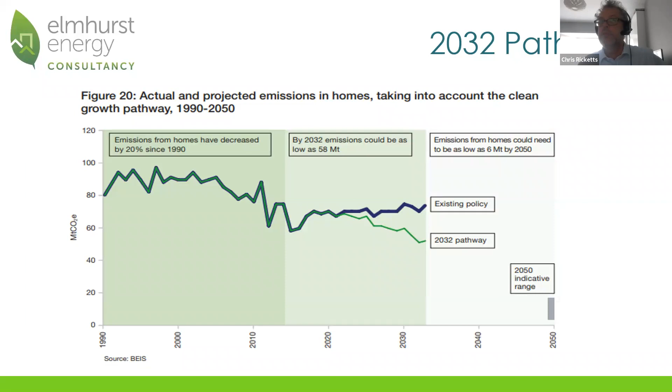And so they came up with this clean growth strategy. And that was all about growing the national income whilst cutting greenhouse gases and their emissions. And hence we'd seen noises about trying to be a leader in wind farm technology. They wanted us to lead the way. And I think it's actually quite good that the government are doing that. And as a consequence, I think there will be lots of employment within this kind of sector.

One of those things was a big commitment to review building regulations. So that's new buildings going forward. And as a consequence, every new building going forward would have to comply to a standard, but then we would have to go back and look at the existing stock and improve that stock. And then they started putting other levers in place as well.

So if you have private rented homes, by 2030, you won't be able to rent them unless they achieve an EPC band C. And they're going to do the same in the commercial sector and the industrial sector. So there's little levers the government will be using to make sure that we are heading on this pathway.

And while this was all going on, we were obviously part of the European Union. We did leave, obviously, but what they did do is they enshrined a lot of those laws that we had in place, those environmental laws, into UK law. And that was a great step for instilling, I reckon, a lot of confidence in this sort of energy sector. Even if we hadn't, we would still have had the UN Paris Climate Change Agreement. And there were some clean growth missions that we had about improving standards and reducing carbon.

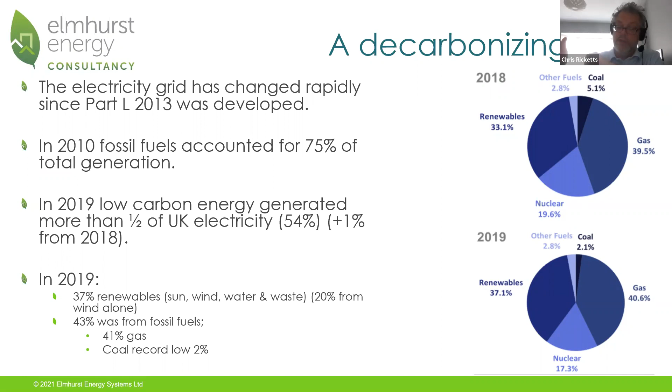Nuclear, interestingly, which is classified as a clean fuel, fell by about 13.6% in 2019, which is one of the lowest levels of nuclear generation. But there has clearly been a turn of removing coal. So you're still getting gas-fired power stations in there, and we've seen a massive increase in the renewables feeding into the network.

So if you look at the future, what they're saying is electricity is becoming a clean fuel. So they're saying, we see this as a way to move towards our net zero obligation. So this won't just be for buildings. Obviously, this will be for other areas like transport. So if we all have electric cars and we're using electricity on the grid, and that electricity is being powered by solar and wind, it is a clean fuel. So they're seeing renewables building, and the generation is being driven more by renewable technology.

Natural gas, they're expecting to decay, and we may have to import some in some areas. It depends on grid demand and energy use, and that's part of the challenge that they have: development of a strategy also means that people increase their usage, but what they're trying to do is reduce the demand per footprint. So somebody's home, instead of using 15 kilowatts, uses 10 kilowatts. So it's all about reduction per area to allow that expansion in growth in our strategies.

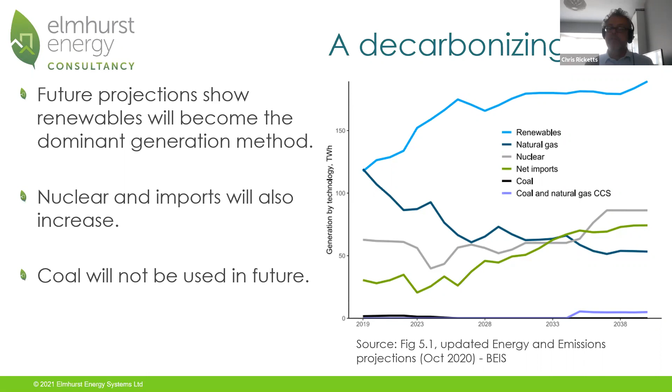If you go to mygridgb.co.uk, you can see the present electricity mix in Britain today. So this was a snapshot; in fact, I just did it about an hour ago. Interestingly enough, we were 47% from low carbon sources at the moment, and it was producing something like 36.5 gigawatts, with a carbon intensity of somewhere around about 245, an hour ago.

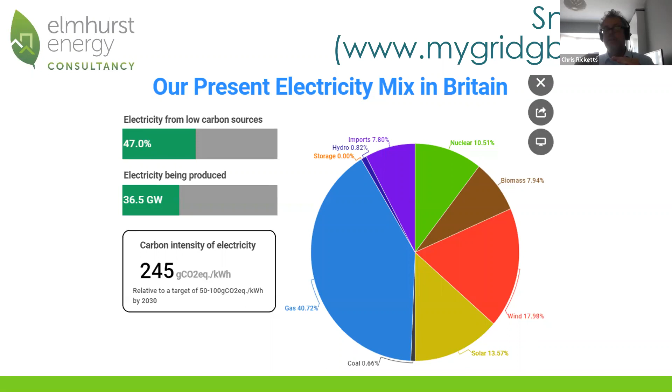So if we want to target for 2050, and we've got this milestone at 2030 of being 50 to 100, we're still way off it at the minute. But compared to 10 years ago, that is a massive move, and what that is representing is that electricity is being seen as a renewable source.

So where does that fit us? This comes to the Future Homes Standard. That clean growth strategy where the government announced we've got to get ourselves on a pathway, we're going to do this Future Homes Standard. So we want all new homes from 2025 to be 75, 80% less carbon emitted than homes built today. And we're in building standards that are 10, 11 years old in some instances, and just the way some of those standards are allowing homes to be built.

So a developer in current times, before the new standard comes into play, if they start on a plot and the standards change, they can finish the plot to an old standard. So you think you're buying a brand new house, but actually it might be built to an old compliance standard. And obviously, to achieve this standard, there are certain milestones they're going to put in place and changes to the building regulations to keep the buildings of dwellings on this flight path. So it doesn't all happen at once, but this is definitely going to have an impact on the uptake of heat pumps.

And essentially, they've done all of these consultations, and these consultations went on. Probably COVID did have an effect upon it, but this Future Homes Standard is their defined path by 2025. What do we want the standard for domestic and commercial buildings to meet? With 40% of our UK total energy use coming from buildings, from heating and powering a building, if we can affect that, then we're having a big effect upon our carbon emissions.

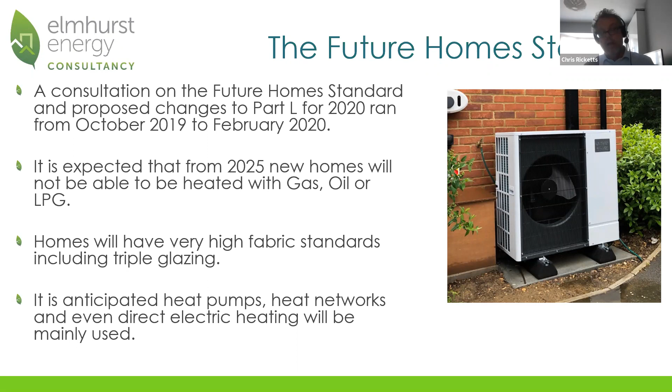And they anticipate the increase of heat networks. Interestingly, I think heat networks will be a challenge area, and actually industrial heat pump solutions will feed into that, along with mining, water, that kind of stuff. But out of the respondents that came back to them, as I said earlier on, 70% felt that heat pumps had a role in the Future Homes Standard. 26% said they think heat networks will be a good solution. There was quite a low number talking about direct electric heating.

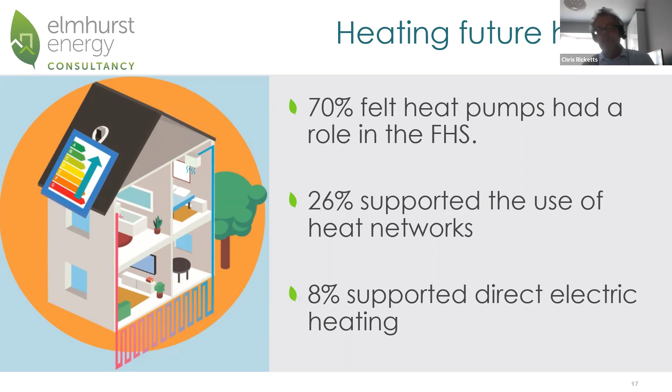But there were some concerns written about heat pumps and quality of design and installation, the changes in consumer behaviors, and would the supply chain be able to support that? And I suppose that's the challenge for us in this industry, to prove how we can do it. They also talked about heat networks, and that's a great way of exploiting larger scale renewable, recovered heat sources from energy from waste, waste heat in industrial processes, and heat from rivers and mines, that kind of thing. So I think we'll see some research and development going on within those kinds of areas.

So they came up with this initial timeline, and you'll see, from them saying, yeah, we're going to do something, there was a whole bit of research they're going to have in place, and they're going to do some case studies and develop some evidence. And with 2025 being the Future Homes Standard, for that to be in place there will be some early adopters. And I'm talking to some developers now who are building some future homes at that new standard, because the challenge for a developer is, how do I get that repeatability at a good cost, without penalizing the homeowner then in buying that property?

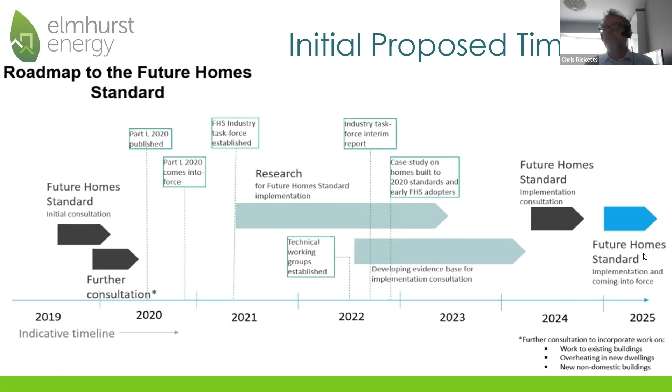And there was a whole chat that got discussed in this consultation: are you going to accelerate it? Is 2025 going to be brought to 2023? And in the end, they produced this new thing. And they said, look, okay, let's clarify how we're going to do this. So we are going to accelerate our move a little bit more. We're going to bring forward a consultation on the new spec, and it will be an improved standard from where we are today. So this new building reg is an interim stage. It's just the first thing to step us towards where we need to be.

There's a lot of work we've got to do, so we're going to set up some technical working groups. We've got an industry task force. We're going to do some case studies on housing that has been built to these 2020 standards, and look at the early adopters, where their challenges are in the marketplace, and that will look at the supply chain of products, and which low carbon technology is being used.

And then further out, that specification standard will be in place from 2025, and that will be reducing a house, compared to a standard today, to 75-80% less emissions. So that's a massive move from a house that you can go and buy today compared to what you will be able to buy in 3 or 4 years' time.

And with that is probably going to be the prohibition of gas central heating, which is the default solution today for a developer. Now, will they outright ban it? I don't know, but I think what will come in place, you will probably see a prohibition of future connections to gas networks. So they will make it difficult to get round this problem.

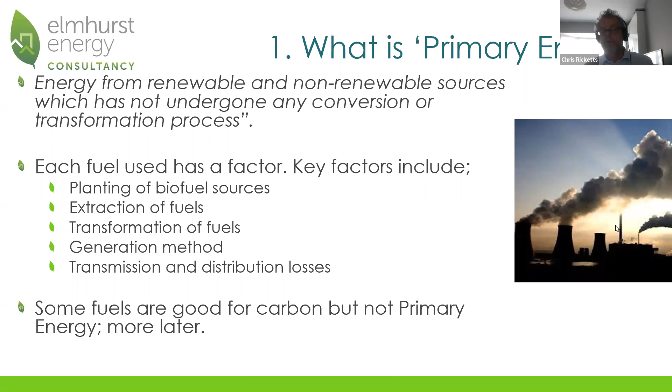So when they were thinking, we want to have nearly zero energy buildings for the future, if we can get the fabric of a building really, really high, you have very low energy loss, and actually we create heat by being in a building, so we don't have to put additional energy into it. With the grid being decarbonised, we're thinking that energy efficiency of a building is less relevant, but the type of energy generation is quite important at this point. So let's take into account what upstream activities are in place.

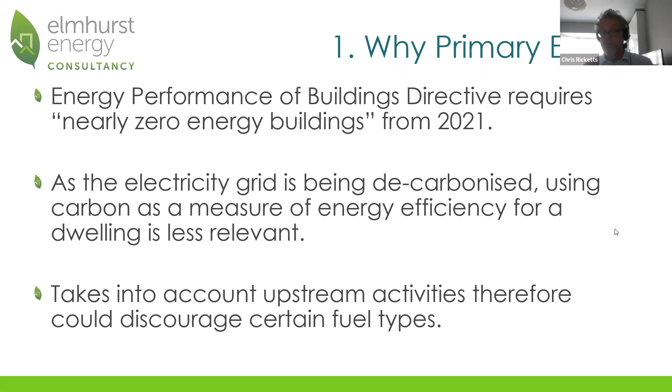So reducing carbon is very important to remain compliant. To get to net zero, they wanted to minimize the impact on dwellings by using a national grid that is as renewable as possible. So that's why they brought in this primary energy. And it's a factor. Basically, you look at the energy of your building when you calculate it, and then you times it by a factor. I'll come into that a little bit later on.

Then you had, obviously, the energy efficiency standards. So this is the fabric of your buildings. If we want to achieve where we need to be on our trajectory for emissions, we needed to change that fabric quickly, and therefore there was this whole thing about U values. This is the transmittance of heat through your wall and your floor and your windows and things like that.

So there's a set of standards for what those building fabrics should look like, but also, when a wall joins a floor, how that's insulated and bonded, how windows are bonded into the wall, how insulation is packed in between rafters and joists, so all of those construction details are being looked at.

And so one of the biggest jumps in their consultations was they wanted this 31% reduction in carbon over the existing standard. So they had a whole look at improved U values for floors, where the junction of a wall and a floor join together, and air tightness of a building, how airtight your building is, with draught proofing, with gaps around doors in its construction. They all lead to a highly efficient thermal building. And then obviously it's about waste heat recovery, whether that be from ventilation systems or from water.

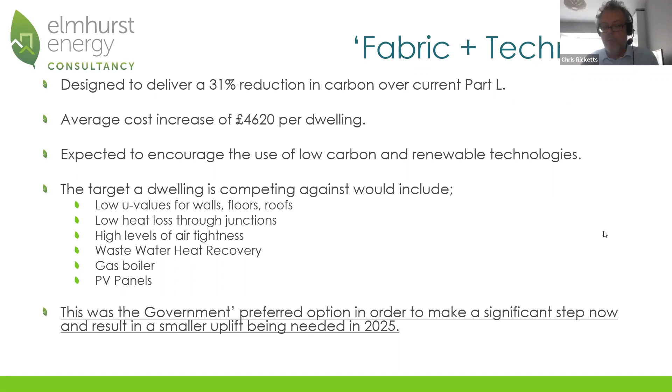So fuel factors. So currently in our building standards, there was a whole challenge really, because you had people that were in cities, urban, rural environments, off grid. And so there was penalization really if you were off gas. There was a whole move to getting people onto gas. It was the most efficient form, and it is. It's a great way of heating your home and doing your heating and hot water. And there was a challenge there if you're using LPG and the efficiency associated with that.

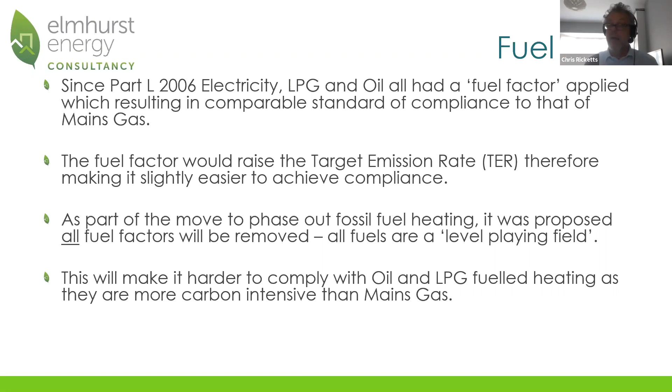And so they used to have this fuel factor in the current standards, which didn't penalize you for having to use LPG or oil when you're off grid, and therefore you wouldn't necessarily have managed to get compliance. So with the grid decarbonising and the drive to non-fossil fuel heating in the future, they said we're going to take away those fuel factors. That means we're going to take away any competition and overtly supporting any one fuel over another, so there'll be no extra reward, so everybody will be on the same level field, and you'll be compared on your primary energy for that kind of fuel and the carbon emissions that come with that.

So this is SAP 2012, that's the second column you can see in my graph. So that was where they normalized, made everything sort of similar. So it didn't matter if you're mains gas, oil, LPG. They weren't too different. And in fact, electricity had a poorer CO2 associated today, but with the new standards, it improved dramatically. They literally go down 73%.

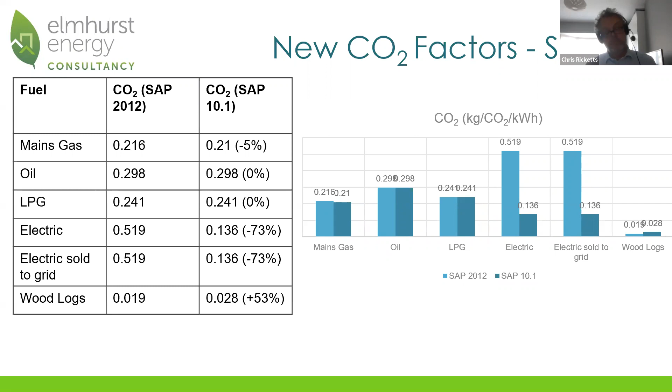With it now being the lowest producer of carbon, they decided they were going to reflect that in their modelling in the SAP software, and hence that's good for heat pumps, because if you run your heat pump on electricity and you've got a good coefficient, 2.5, 3, sometimes more than that, and carbon is one of those building regulations metrics, it means that electricity will have very low carbon emissions compared to gas. It therefore will be a lot easier to comply with the carbon standard by using electricity, which again supports your sort of products.

So we did some modelling really. Whenever there's this kind of change, the first thing we get is a load of phone calls from lots of different people, particularly developers, and they want to review their specifications, and quite often most of them today are already exceeding existing standards, but they're probably not good enough to comply in the future. And what they want to know is, do I have to do a complete rewrite of my spec, or have I got to tweak certain aspects? And heating is one of the biggest influences on their overall energy efficiency. So they currently use gas boilers as a default application.

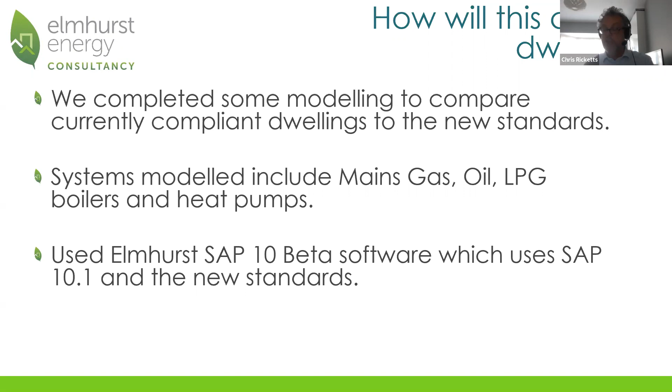But the new metrics of the decarbonising grid may not make that the best energy efficient sort of solution for the future. So we took some existing buildings, current spec, just to get an idea if we then implemented the new changes. Didn't change anything in there, but just changed, say, the heating source, what would the winners and the losers look like? And interestingly enough, so here's a comparison.

This is a current building, compliant today, and we then put it in against the compliance targets for this next version of Part L. So I'm only looking at the carbon emissions and the primary energy at the minute. So they're two of the metrics, because obviously I'm keeping the fabric standards to the current standard today. And this shows the relative performance of the different types of fuels and the heating systems. And you'll see that some achieve compliance quite easily and some will be a lot more difficult. And as a consequence, they'll have to then influence other areas.

So carbon being one of the metrics, the predicted carbon emissions are in the left-hand column, with the maximum amount, which is in the right-hand column. And you'll see that oil, LPG, they've got the highest emissions of all the fuels. They wouldn't comply just by default. But actually, if you had a standard heat pump you would have put in today, just taken out of the database that's built into SAP, or direct panel heating,

I could take a building today, just put a heat pump into it, and I will meet its carbon emissions on compliance, tick. Don't have to do anything else on that bit, but I'd have to do something else because of my primary energy. My primary energy target is 44.63. With a heat pump, it's 63.4. So I'd have to make some kind of difference now.

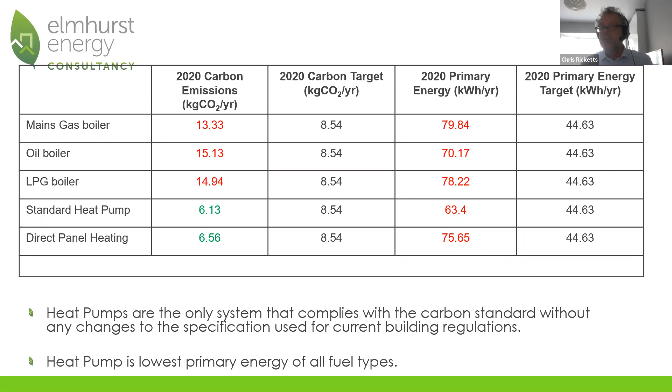So interestingly, you notice in there that direct panel heating performs worse against the metrics than heat pumps, and that's because it has a lower efficiency. It's because for 1 kilowatt coming in, I'm actually putting 2.5, 3 kilowatts into the building. Whereas direct panel heating might be 100% efficient, taking 3 kilowatts in, putting 3 kilowatts out, or 99%, but it's not got that multiplier associated with it.

So thinking about that, final thoughts, the next decade, electric will become the favoured method of powering homes, which leads towards heat pumps being a prime source. Oil, LPG, mains gas clearly are going to get phased out, I think, in building regulations by 2025. And from now, I think oil and LPG will simply not be cost effective in a new home, due to the amount of work it will need to offset that carbon and energy use in them.

Low temperature heating is going to be future proofed into those homes. With this flow temperature being moved down to 55, we may even see it move further. Maybe 35, 40, I don't know.

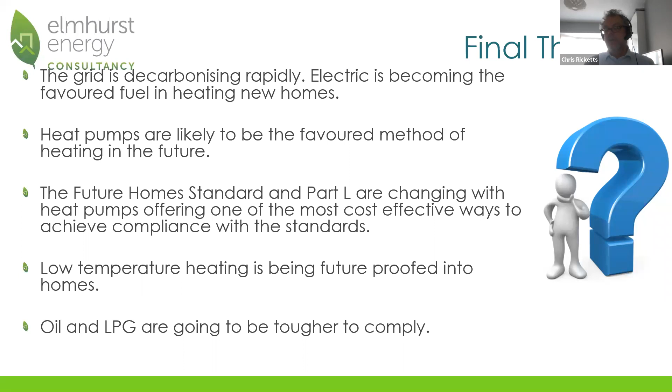But in the future, if we've got this milestone in place, that means the switch to a heat pump at a later stage will require a limited amount of work. The challenge today, and other bits of work I look at, is how many existing radiators are oversized today, so that you could put a heat pump in without having to make all those system changes that people need. So that's the sort of final thought on that.

Last couple of slides. So this is just where we are. That was an overview: landscape, future, compliance. Why I think it ticks all the boxes that heat pumps are going to be the default position going forward. We do a lot of testing and evaluation and research. My sister company does all the compliance work and the accreditation. And back over to you now if there's any questions.

Hi, thank you very much for that, Chris. We do have a couple of questions. Matt Collins, sorry, Matt, I don't know if you can be a bit more specific, because I think we've passed that point in the presentation now. This method, I'm not sure which one it's referring to there, will put pressure on the grid by electrifying heat and replacing gas. Will the electricity infrastructure be able to cope with the increased demand?

Well, that's a good point. To me, I agree with that statement. And this is where I think the government has its challenges. I know that they set up lots of research into these sorts of areas. There's some research going on, I was talking to Oxford recently, where they're trying to overlay all of these pieces of data with energy generation companies, the network, the users. This is why they like the idea of smart meters, because this gives you more visibility of where that use is and where the constraints come into place. And that leads to planning developments, so don't carry on building over here, because that puts too much of a constraint or bottleneck on the grid here.